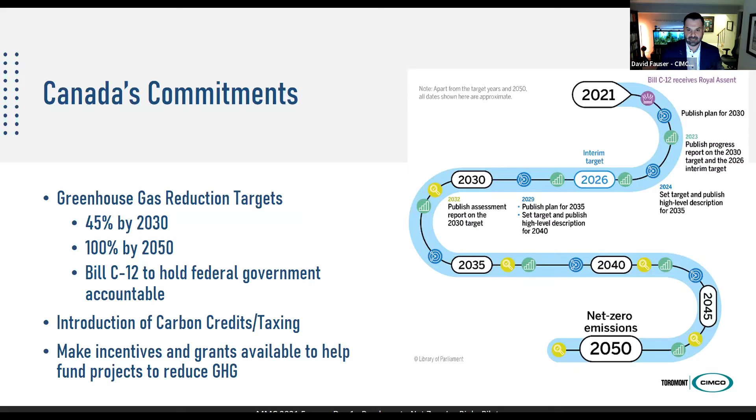And the most exciting part about this is that the Canadian government has put their money where their mouth is. Now, I'm not going to give as much justice to this as the Federation of Canadian Municipalities that are next, but I do want to say that they have allocated a substantial amount of funds to help municipalities get to net zero. So that's very, very important. So the point of this slide is that this is legislated, it's something that's important, and the government has made funds available for us to get there.

Now, why ice rinks? Well, ice rinks are the second or third largest emitter of greenhouse gas within a municipality. And what makes ice rinks so exciting in this particular space is that we can eliminate all of the natural gas from ice rinks through waste heat and through heat pumps. Not only is this the second or third largest emitter of greenhouse gas, it's also because the byproduct of refrigeration is waste heat. It's also an area where you can actually get to that 45% reduction in greenhouse gas within one of your facilities. So every town has an ice rink, and this is a tremendous opportunity for us to tap into that and move forward with it.

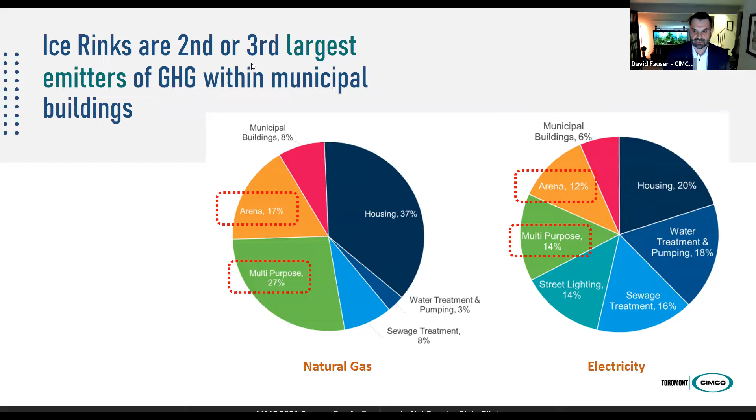So the question is, pathway to net zero, how do we get there? Like I said, this presentation, I'm already into this for 7 minutes now, and I could go on about this for 2 or 3 hours. So again, it's a very high overview, but let's take a look at the perfect scenario.

This technology already exists: an ice rink that uses solar panels with a battery that provides energy to a refrigeration system that makes a great sheet of ice. And the waste heat from that refrigeration then goes back into heating the building for all the showers, the domestic hot water and heating. And in the event that a refrigerant should leak to atmosphere, it's a natural refrigerant with no issues to the environment.

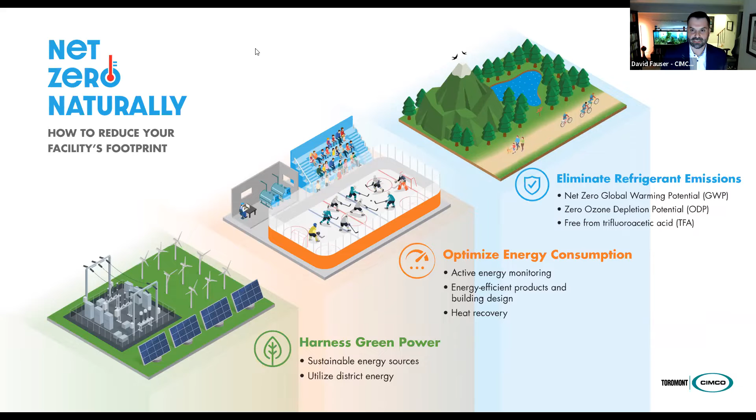So our pathway to net zero is to ensure that you do not use refrigerants with high global warming potential, that you optimize your energy consumption through active energy monitoring, heat recovery, and then you harness green power. And the great thing about this is these technologies all exist today, and you're able to accomplish this.

So let's dive into the first one: eliminate refrigerant emissions. Earlier, I said that certain refrigerants cause global warming, and it's estimated that 10% of global warming globally is caused by refrigerants. So this is something that's pretty important, but it's not just in ice rinks.

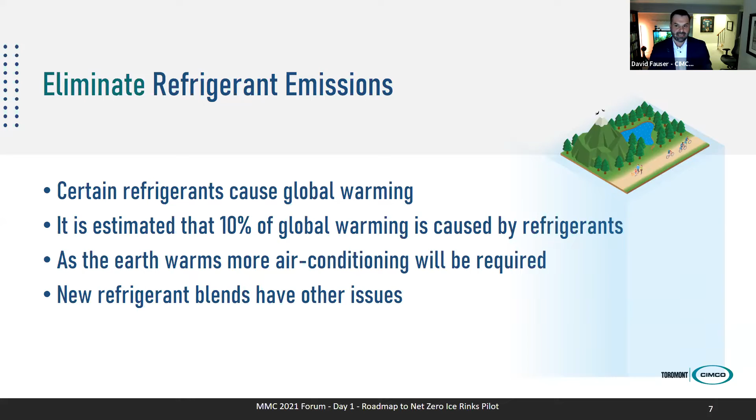Refrigerants are all over your municipality. You have rooftop units on all of your community centers and your town halls. You have vending machines all over the place. You've got these commercial style refrigerators. You've got your town vehicles, and of course you have your refrigeration systems. And I'm sure there's more out there that use refrigerants. It's one of those things, unless you're aware of it, you don't realize it.

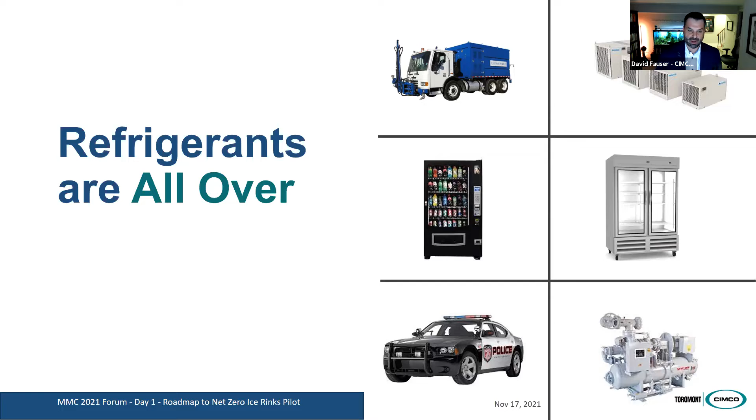But the big problem is that when these refrigerants leak to atmosphere... there's a couple of studies out there by Greenpeace, and one of them is that 80% of R22, the one that was just phased out recently, is in our atmosphere right now. When it goes into our atmosphere, it sits there and creates a haze, so to speak, and that's what's causing the energy to reflect up and then reflect back down to Earth.

And so how do these leak? Well, they leak at the end of life. That's the single biggest issue. If you have a rooftop unit, you go to get it replaced, it's a lot of work for that company to reclaim all that refrigerant and take it to a disposal site, when all they really have to do is crack a valve and just let it go to atmosphere. It's odorless, it doesn't smell, it just goes to atmosphere, nobody's the wiser.

And that's why 80% is out there in the environment. It makes sense because you throw out your refrigerator, you get rid of your car, it's just one of those things that's pretty easy for somebody to crack a valve. And if they don't understand what the consequences are, then it just happens. And it's very hard to police. There's a lot of studies out there if you have any interest in the impacts and why end of life is such an issue.

Second of all, maintenance. When you do maintenance to a piece of equipment, you take a piece of equipment out, if the valves aren't working or it's not properly done, we're going to have some maintenance leaks, and finally breakdowns and failures. You know, your air conditioner, your car breaks down, you don't have air conditioner, guess what? You're out of refrigerants. Those are all the reasons why this ends up in our atmosphere.

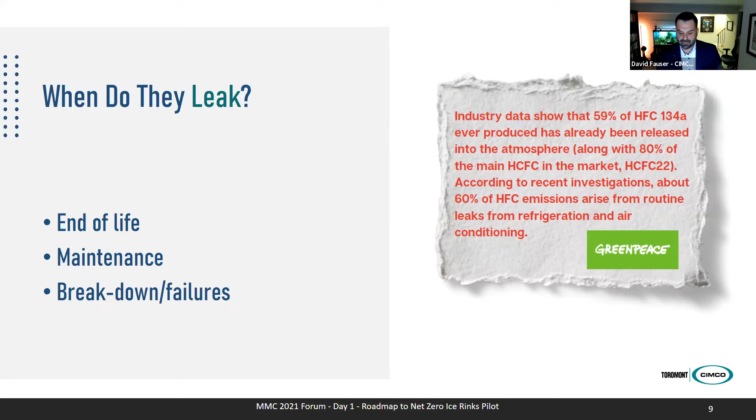So as I said, it's a huge problem, it's 10% of the issues. Diving in a little bit to these refrigerants and what they are - and this is the problem with this topic, it's really, really complicated from a technical perspective. This is just a high level, easy to understand chart of some of the different types of refrigerants that are out there.

So if you've heard of R22 before, that would have been the latest refrigerant that was just phased out. It's a combination of hydrogen, chlorine, fluorine, and carbon in that sort of order. And it causes two issues: ozone depletion and global warming potential. So that was phased out. Right now you cannot install a new system with R22 in it. However, there's still lots of them in operation.

The next phase to help combat global warming, they released something called HFC. So as you can see here in the chart, very easy - the chlorine was taken out, and there you go, you've got an HFC. R134A is very popular in cars and air conditioning systems. Very high global warming potential, that's the result. So right now, if you read about the Kigali Amendment, the Paris Accord, these are the current target to be phased out next.

What we're seeing now are these new HFO, HFC blends. So a blend is when they take two refrigerants together, like a fine scotch, and they make a blended scotch. This is a combination, and the reason why they've done this is because the HFOs are flammable, the HFCs have high global warming potential. You mix them together and you have one that's less flammable with less global warming potential. And then you're left with this HFO, HFC blend, and they're really the flavor of the day today. The biggest difference is organic compounds were added in.

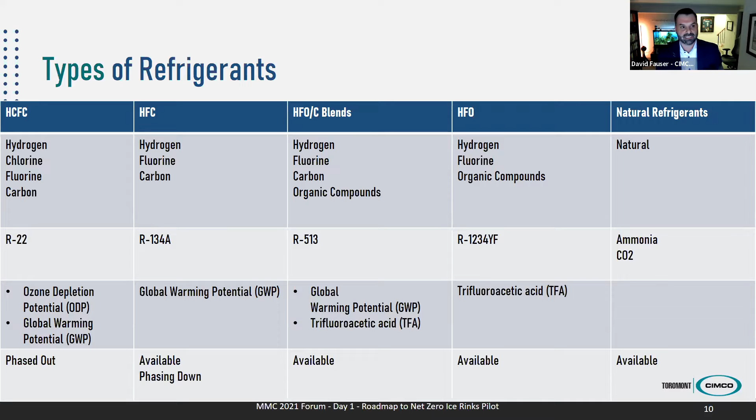And then finally, our last category - actually most ice rinks have natural refrigerants already, which is great. Ammonia and CO2, they're made of natural compounds, which means that if they leak to atmosphere, there's no issue. So that's talking a mile a minute about the different types of refrigerants, but it's an important topic, and it's beyond the engine room - it's beyond the engine room, and it's all within your municipality.

So when we're taking a look at how do I make the decision, well, first of all, some criteria is: how much energy does it use? What's the safety issues? What's the available technology out there?

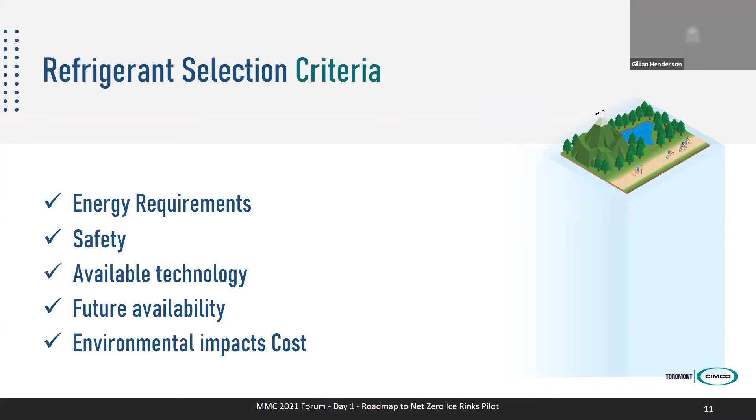You cannot go to a car dealership and say, give me a car with ammonia for air conditioning. It just doesn't exist. You still need to have cars. What's the future availability of this refrigerant? That should be a question. And finally, the environmental impact on cost.

So really quickly, Coles Notes: energy requirements. This is a typical 100-ton plant using different types of refrigerant, at 10 degrees suction, 90 degrees discharge. And as you can see, the horsepower per ton - based on this study done with all these different refrigerants, a CO2 system and an ammonia system would require 123 horsepower per ton, where an R22 system would require 150 horsepower per ton. What does this mean to you? Horsepower per ton efficiency is how much horsepower is required to generate the refrigeration at those temperatures, which means that ammonia and CO2, the natural refrigerants, are more efficient.

So that's one of the key reasons why we see ammonia or CO2 in 80% of the ice rinks out there.

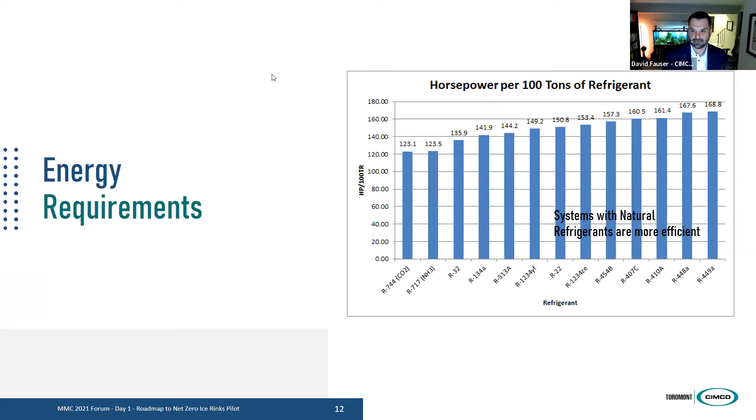The second point I'm going to bring up here is future availability. Refrigerants - as I mentioned, there's 5 top priorities in the beginning of my presentation, and one of them is reducing refrigerants. This is something on the mind of governments and policymakers. There are a couple of policies that already exist, like the Montreal Protocol for ozone depletion, the Paris Agreement, and the Kigali Amendment, which are global agreements. We're also seeing more regional initiatives, like California with their GWP limits that they've now placed for their own state. We expect to see more of these moving forward.

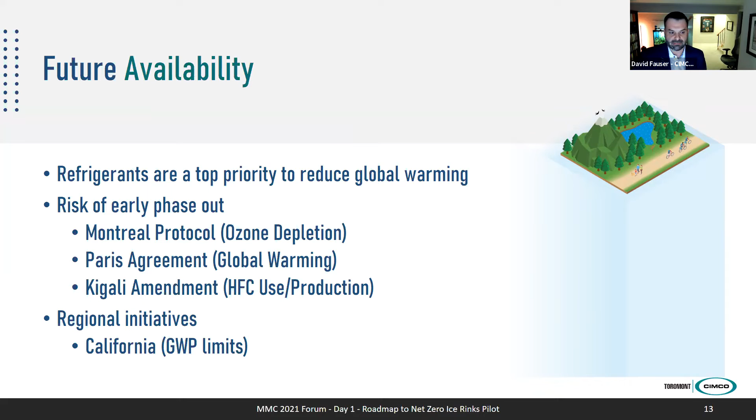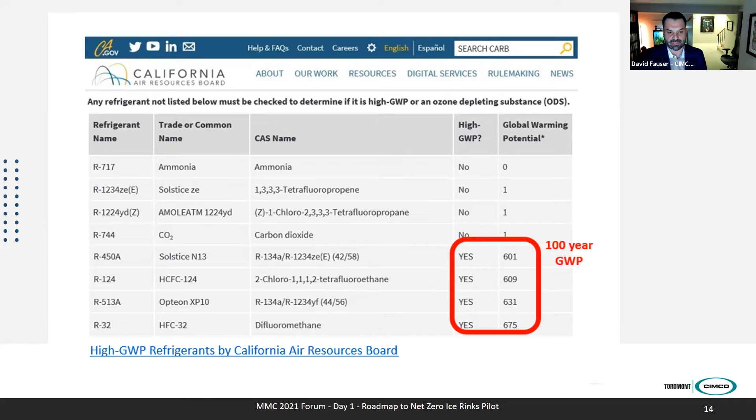As you can see, California - anything over 150, if you go to the CARB website, which is the California Air Resources Board, anything over 150 is considered high. So as you're taking a look at your options, anything over 150 is a high global warming refrigerant. Cost per pound is another criteria.

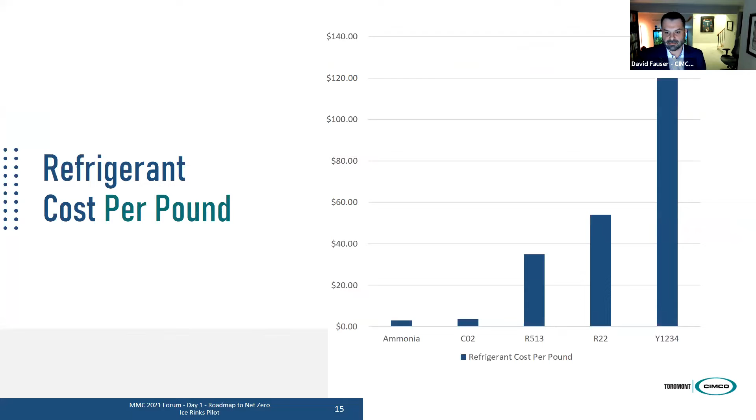These are some costs that I just got. I think in the world of refrigerants there's a big range, but on this particular day when I got the costs, ammonia and CO2 were about $3 a pound, and some of the other designer refrigerants are substantially more.

Safety - one of the misconceptions here is that refrigerants are safe. Every refrigerant is dangerous, and it all depends on exactly what kind of danger you're facing. If you take a look at the MSDS sheet of whatever refrigerant you're looking at, you're going to see what some of the issues are. They could cause burns, toxicity, asphyxiation, they could be flammable. So it's important to know the facts.

But the important thing I'd like to stress to the crowd here today is that there is no safe refrigerant - none that you can just crack a valve and breathe in, or put on your skin, without having some sort of issue. It's like anything else in life: cars can be dangerous to drive or operate, and boilers in our house and propane gas barbecues - all these things are dangerous if you don't maintain them and don't know how to use them.

But we can mitigate things, and the way we can mitigate things is through lower charge. There are great technologies out there right now where we can get a charge of refrigerant under a cylinder per pad in an ice rink. We also have technologies that can sense a refrigerant leak and automatically pump the system down and store it, so in the event there is a leak, it happens automatically. Really good leak detection is going to help you, along with ventilation.

And then finally, the two key points: regular maintenance and life cycle replacement. These refrigeration systems are machinery - machinery that has the capability of breaking down. They need to be maintained, and you need to replace failed and worn parts. So that's a very important thing as we take a look at the safety factor.

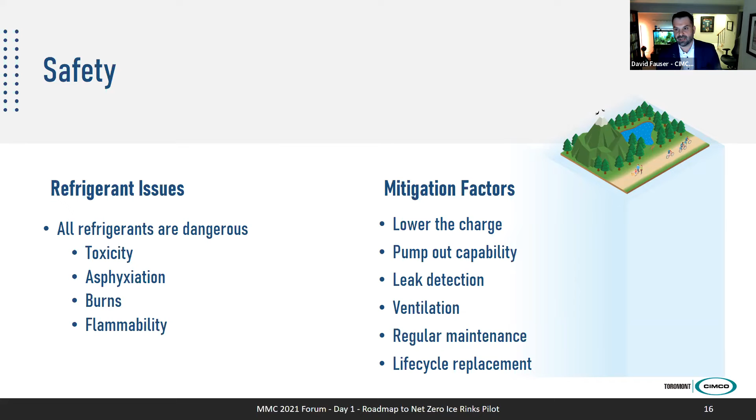But I do urge again, as you're looking at this, don't get caught up thinking that's safe, I don't need to worry. You do need to worry, okay?

So a little business case: Barbara Ann Scott Ice Rink Trail, a great little trail in the city of Toronto, downtown.

It uses CO2 direct, and it's a great sheet of ice. If you find yourself downtown Toronto, I would highly recommend skating on it. It was the first CO2 ice rink trail in North America.

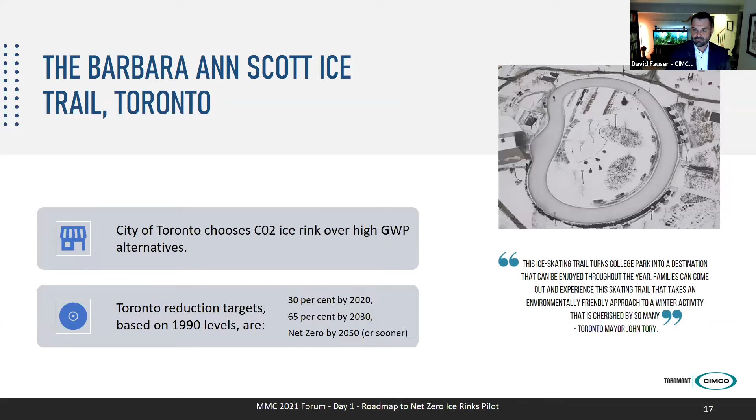Moving along to our next category. I promised you not everything is that long, I just spent most of the time on the refrigerant section. I'm just going to quickly touch on eliminating refrigerant emissions and harnessing green power.

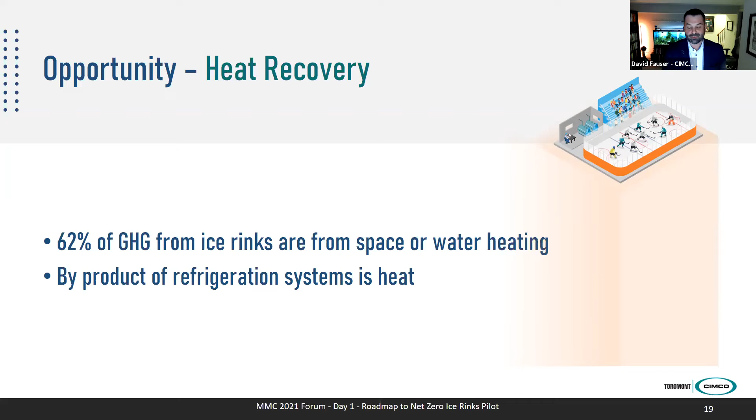This next section is all about heat recovery, as Frank was talking about. 62% of greenhouse gas from ice rinks comes from space and water heating. That's what I personally find so exciting here when we talk about getting to net zero, because the byproduct of a refrigeration system is heat, which means if we can tap into that, it's our pathway to net zero with some substantial gains.

Here's a view of our EcoChill system and the ice rink. It's still crazy when you think about how we design these rinks sometimes - in this one room we have a system providing cooling, and we just throw the heat outside. Then we've got this other room that's paying for natural gas to come in to heat all the things you require in the rink, when really we should be looking at it from a holistic point of view. The technology exists, with lots and lots of examples.

So I think this is a great opportunity. I'm thrilled to see that was picked up by the studies.

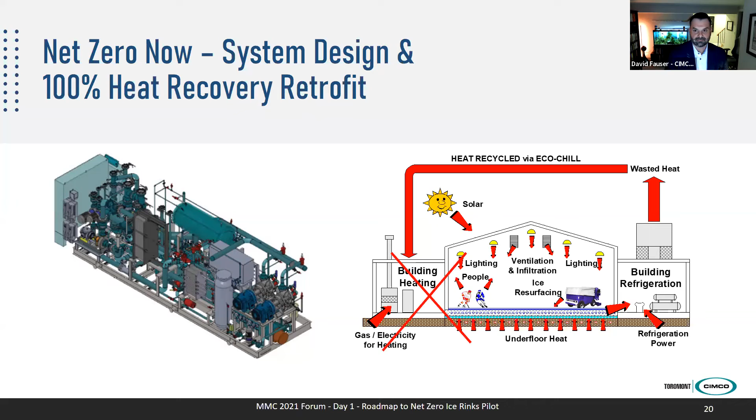Okay, so retrofit options - we have lots and lots of retrofit options. You don't always have to do a brand new install if you're going to get there. I can get into details, but essentially these are add-ons to the system so that you can get to net zero over time.

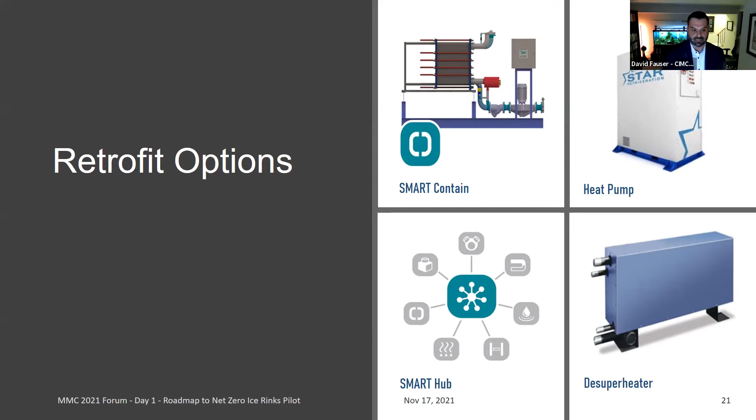Realistically speaking, probably 90% of the buildings are going to be net zero over time, because we're not going to build brand new buildings all over the place. So again, a great study will identify all of these things.

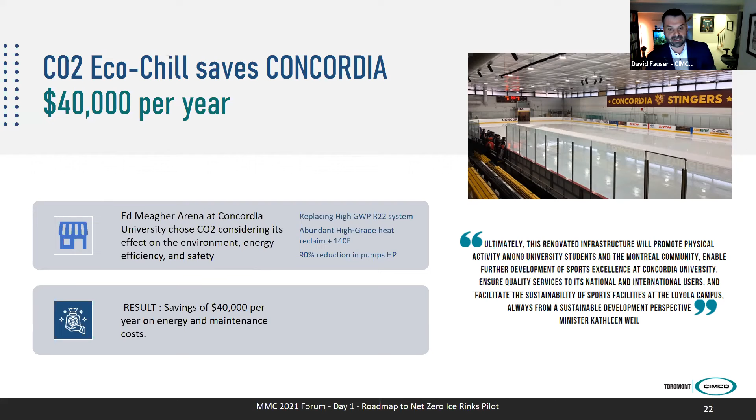Here's a quick case study. Concordia University went from an R22 system to a CO2 system - again, $40,000 per year in savings. A great story, and you can find this case study in more detail on our website.

Now just shifting gears a little bit here from the ice rinks. This is a job we did in Edmonton, building a new community. Inside this little spaceship-looking building is an EcoChill system, which would be the same system you would put into a hockey rink.

But they're not cooling a hockey rink. Actually, what they're doing is using the technology of 1 unit of energy in for 4 units of energy of heat, and they're heating the 30,000 residents within the community with district heating and cooling from this one single plant. I know there are a lot of municipalities here - this is a fantastic business case for getting rid of a lot of boilers at homes, and being able to utilize this whole concept of district heating and cooling.

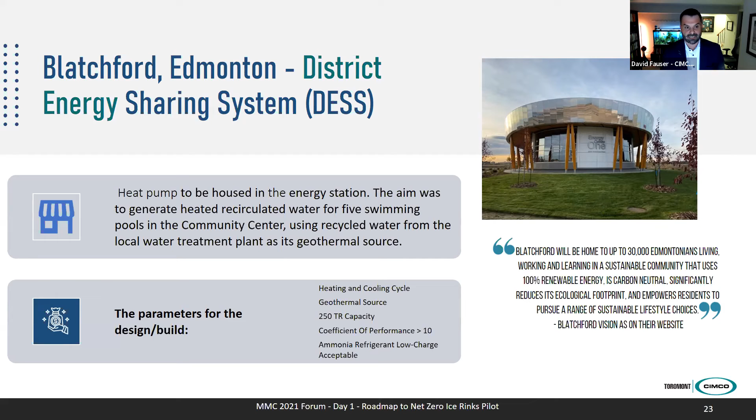And these are the types of projects that are going to help get us to net zero. Okay, so next is harnessing green power - probably the section I'm most excited about today.

Ontario generates green power, we all know we use nuclear, but there are a couple of factors we have to consider. Number one, electricity is expected to increase - expected to get more expensive for a variety of reasons. The other thing is there's a belief that as we electrify more and more, access to power is going to be a concern.

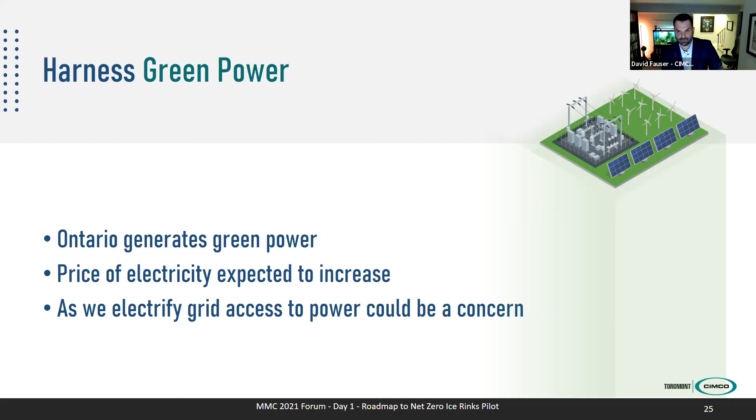So although we already produce green power today, which is great, tomorrow we're going to have to address that. Either they're going to build more nuclear power plants, or they're going to have to look at on-site green power. The great thing we're offering right now is a sun/battery energy storage solution.

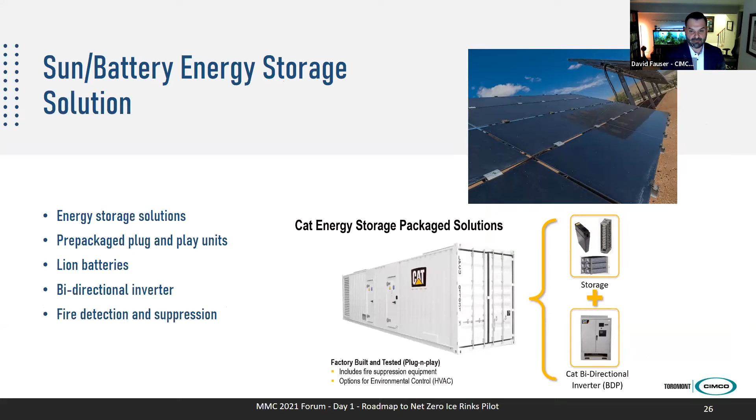This uses solar power and a battery. Really the concept would be that we'd be able to put one of these systems in, which would generate enough power for the ice rink, which would then generate enough heat for the building. So this really does bring us back to this holistic net zero naturally solution.

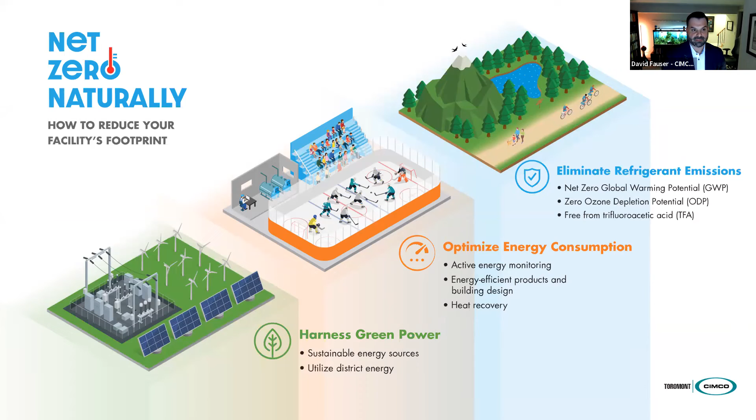And so anyways, that sort of sums it up from a big picture perspective, 1,000 words a minute type of presentation. But how can we help?

Well, we've got a 4-step plan. The first step, and this aligns with the FCM grants, and with what EnerLife has been doing, and with what the city of Markham was just talking about doing, is first let's get the big picture done. Let's understand where you are. Let's baseline. Everything starts with the truth. Where are we today, and how do we move forward?

Step number 2, as Frank was talking about, let's check off those easy wins, the ones with the good paybacks. And as we start getting momentum, we got to get into the deep work. These may be a little bit more complicated, but we can still do it. And then finally, step 4 is the long game, where we start to put on the on-site green power and some of these things that maybe the payback's not quite there, but if we're really going to get to net zero, these are the type of projects we're going to have to tackle.

I know I've already gone over these incentives, and the Federation of Canadian Municipalities is after me, and they're going to talk about this in much more detail than I can. But what I can say is that this is available. It's a gift from our federal government. Let's take advantage of it, and let's see if we can start driving towards some of these net zero solutions.

So I really appreciate the opportunity to speak with everyone today. And as I said, any questions you may have, or if you want to start a conversation with regards to your own particular municipality, let's dive in and let's have a conversation. So thank you very much.